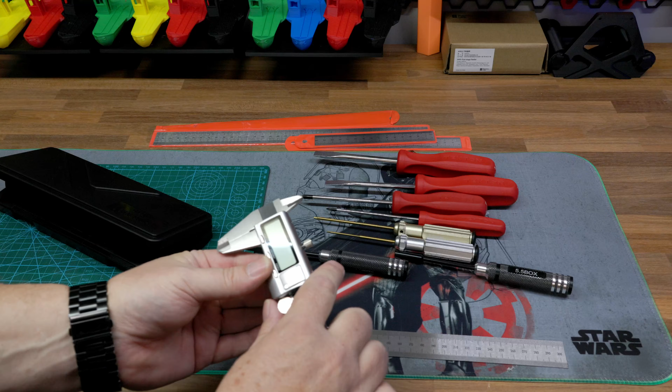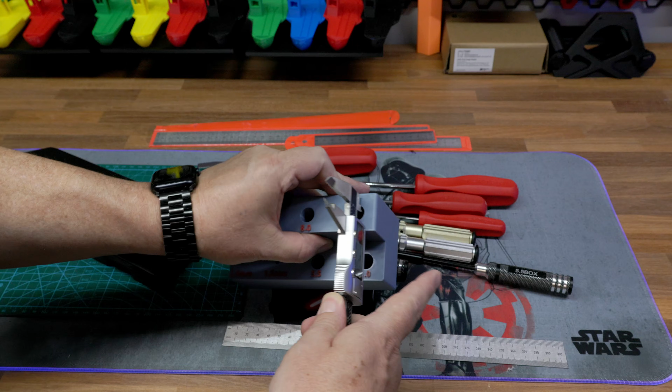The last thing I'd recommend is a good digital caliper. I have links in the description to all of this stuff. What these are good for is whenever you need to make a hole, they're really good to measure the shaft or whatever it happens to be, or measure the inside of a hole that's already there. So with that, these are the tools I'd recommend for today's project.

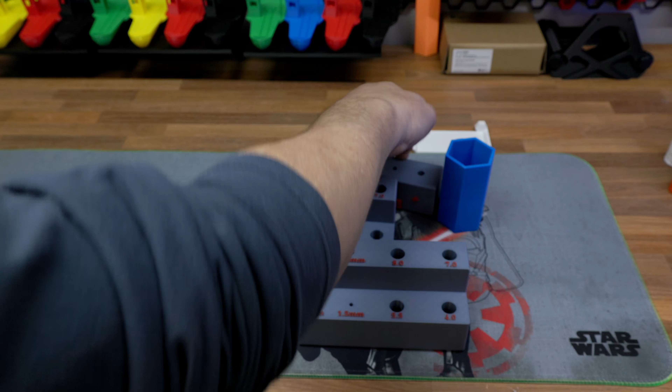So let's get started. Let's go over a couple of things we'll be making today. I think we'll make a couple of screwdriver stands and some hex driver stands. I'll show you all the different ways to do that, all the way from making the holes, making these blocks, how to add cool logos to different things, but probably more importantly, how do you actually attach this to the honeycomb wall easily.

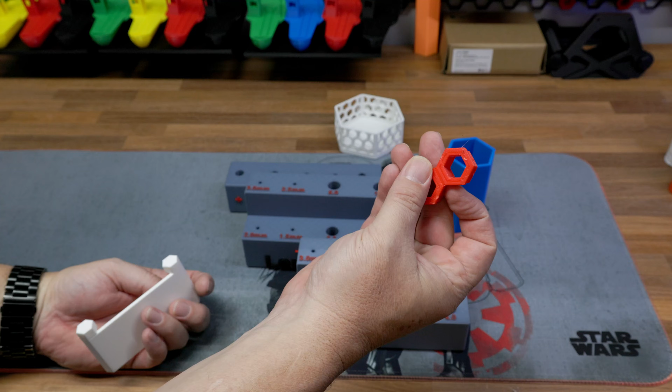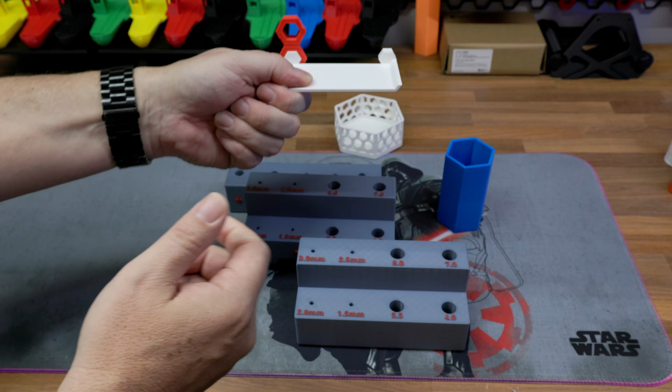If you guys have printed this out already, you know there are these inner hexes and outer hex things, or you can even see on the connections they have these open hexes. You can either slide things in and snap that into the honeycomb, or you could even print these right directly onto the back of the object you're trying to make and just put that on there. At first I was super excited to do that because that seemed like less printing, the easy way to do it.

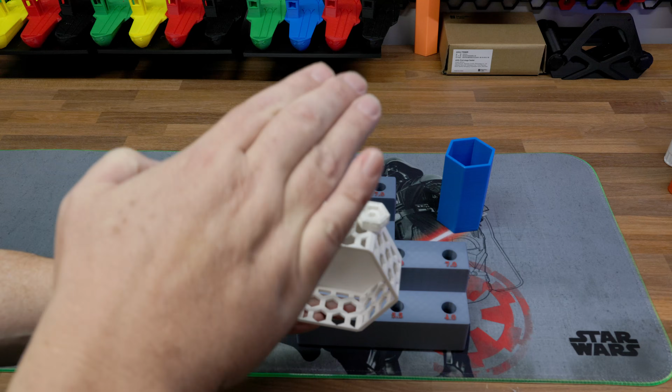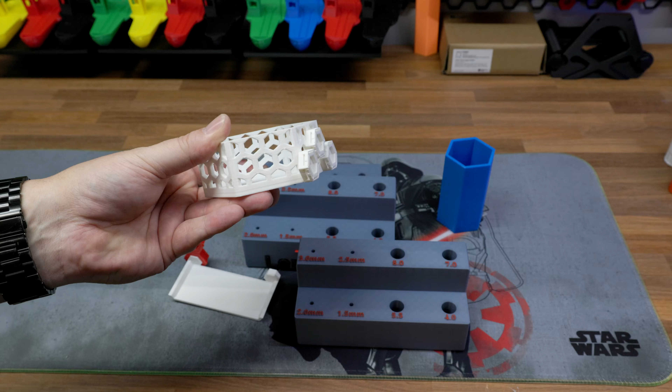But I can tell you, if you print it like this, you'll be fine, it'll print just fine. Otherwise, as soon as you put it on its side and it has to print all of these gaps, you can see this one's not totally perfect. So it's a lot harder to print these pieces, and you really have to have it in a certain orientation to do so.

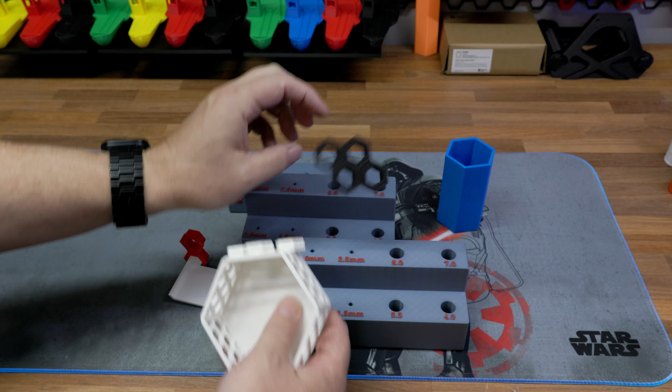The other thing that's a huge issue with doing it this way is, say you have one of these corner pieces that's connecting your honeycomb and you want to put this right where one of those go—you can't really do that.

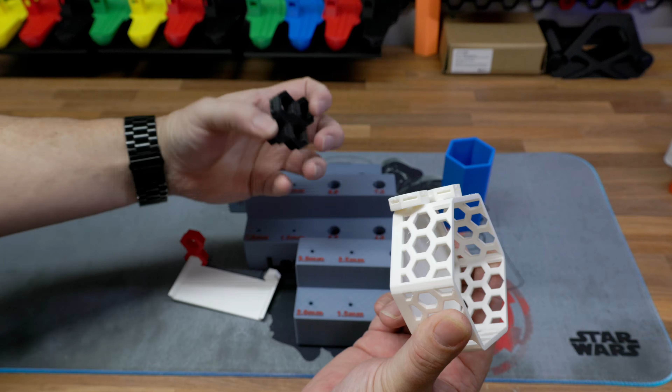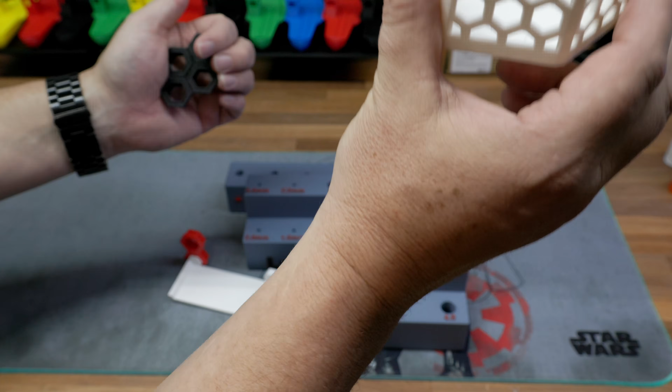So I don't recommend, again, you can do what you want and put these things on there as you want, but I don't recommend printing these for those two reasons: hard to print, and then it's kind of hard to place the thing afterwards because you can only put it in certain places. So everything we'll be doing today will be based on this shelf.

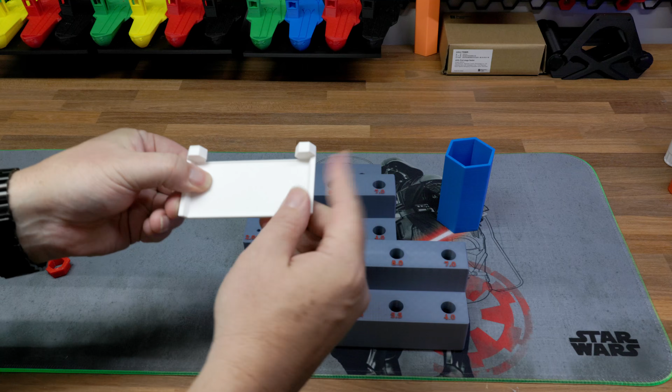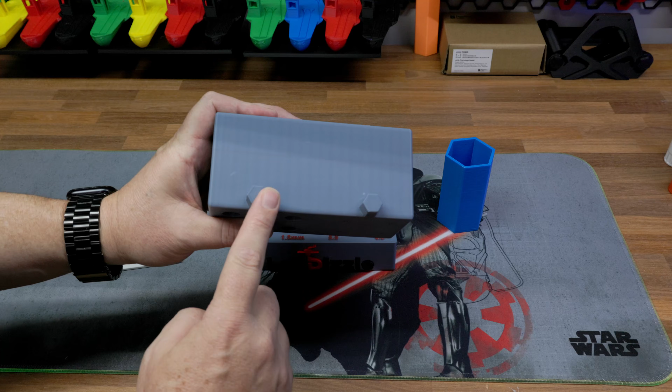The shelf has 2 of these things on there, and mainly this hexagon that's right there. You'll see on the back of these, that's how I am connecting these. I can just throw something on there and snap it onto the wall, or if I need to put it on one of the connectors in between, I can easily do that.

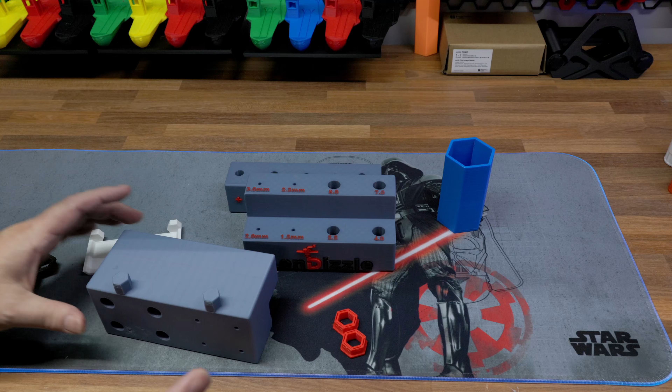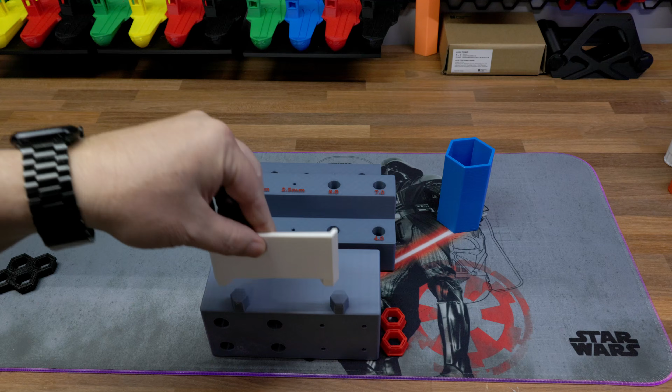But what else is crucial is getting the spacing between all of these correct, right? The spacing here needs to be the same as the spacing that's in there. So I can tell you that these shelves that are already pre-made are super helpful at doing that.

If we can just cut off these little hexes on these shelves and attach them to our pieces, that would be a real easy way to do that, and I never have to measure anything at all. So that's the route I've gone: use just these inner hexes, use the shelf in Tinkercad, and slice off those hexes since they're the right measurement I need. I just slice off the shelf, add it to my piece, and we're good to go. Let me get Tinkercad set up and I'll show you what I'm talking about.

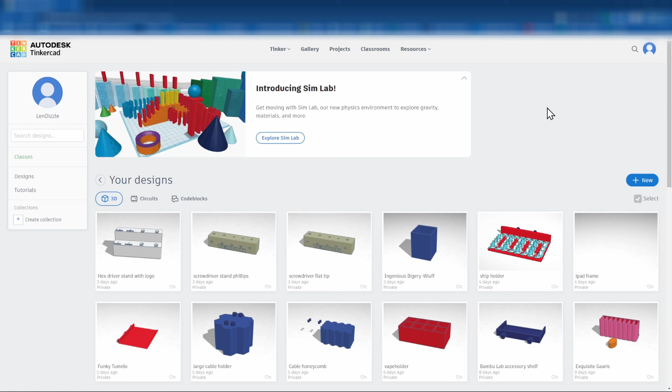Head over to tinkercad.com, sign in with your Google account or set up an account. This is by Autodesk. You can use other software if you want, like Fusion 360, or any of the different CAD designs. The only reason I'm using this one is it's free, you don't have to download anything, and it works pretty good. The concept of what I'm doing here can be translated to these other programs—there might be some differences, but the overall concept's the same.

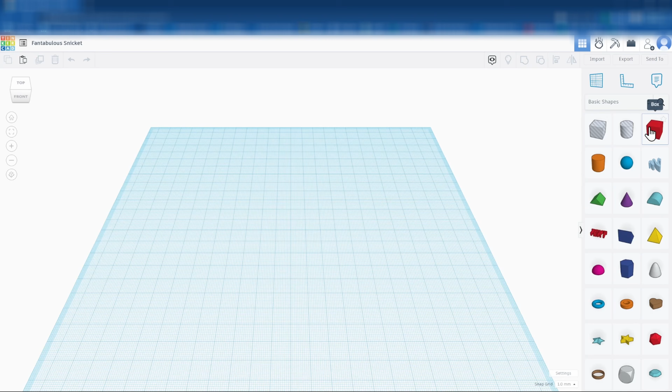So what we'll do is hit New, 3D Design. Really, what we'll be messing with today is these top 3 objects right here. Not that we can't use the rest of these, but for today's purposes we'll be using these. Hopefully this will jumpstart you into playing around and tinkering in here—Tinkercad, the name of it.

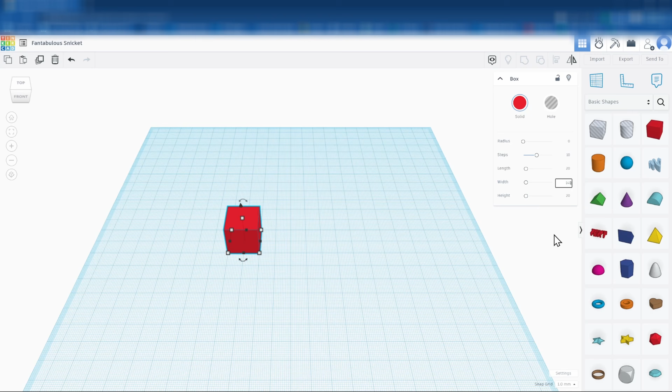So we'll start off with the box. Let's make a holder for 4 screwdrivers across right here—we'll say we're making a screwdriver holder. That's a pretty common thing you'll need in your makerspace, right? So let's go over here and change the width to 140. We'll leave the length and the height at 20 millimeters. Again, you can change this to fit whatever sizes you need.

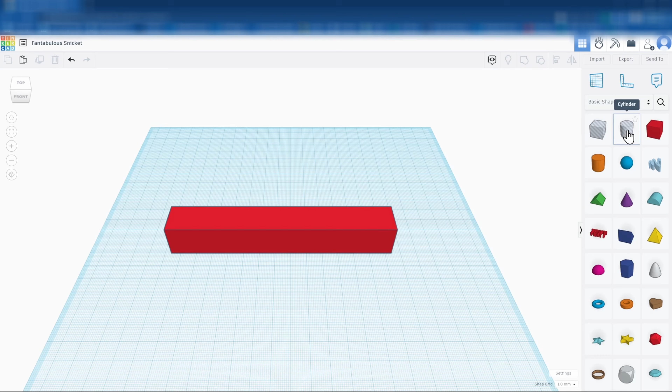So what we'll need is some holes in this block across here to hold our screwdrivers, right? What's neat about Tinkercad is it has these hole shapes, which is kind of like the negative part stuff you see in the Bambu Lab studio. What you can do is have this shape, and it'll make a hole wherever this shape is whenever you combine the shapes together, and I'll show you how to do that.

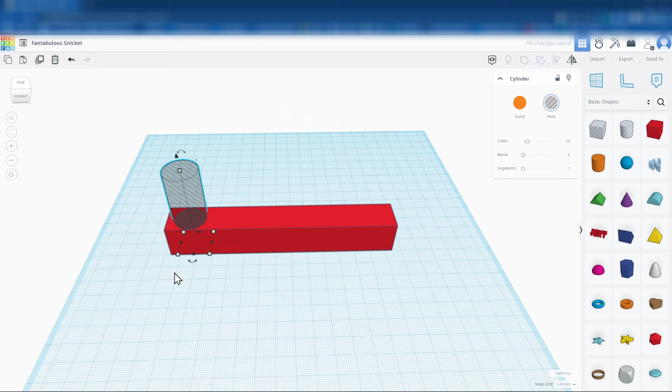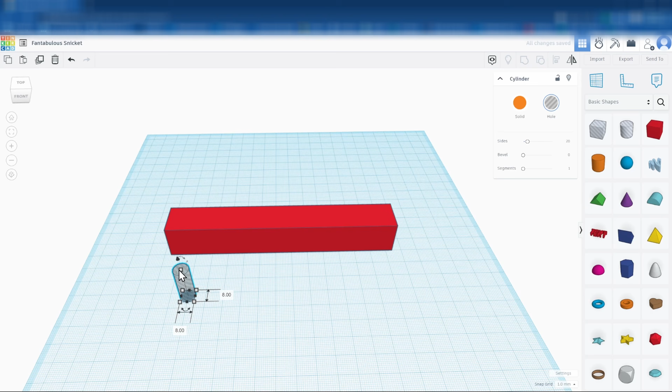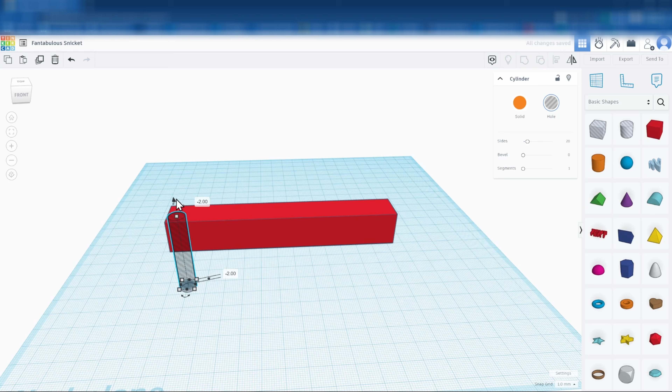So let's say we've measured our screwdriver that we want to put in this first hole here—all of our screwdrivers are 8 millimeters around. So we'll use shift whenever we click on here, and hit 8 millimeters, and it'll scale everything down to 8 millimeters, 8 millimeters, and the scale of whatever this one was. We'll want to make sure this is definitely longer than the object, and we want it to go all the way through. Right now it's sitting right at the surface, which will work, but I always like to hit this little arrow to move it down a millimeter or 2—that arrow is how you move things up and down.

So same with this, if I wanted to move it up and down, I could do that as well. Now that we have the size of our hole, we need to place it in here, and there's a couple of tricks we can use to do this.

If you set it right on the edge, you'll see that the snap grid is 1 millimeter. So every time I hit the right arrow, it's going 1 millimeter. I can take this to the edge, put the center on the edge right there. But let's say I wanted this 10 millimeters in: 1, 2, 3, 4, 5, 6, 7, 8, 9, 10.

You can use a ruler to do all of this, but I'm going to try to make this really easy. The other thing we want to do is center this. So again, we could do 20 millimeters, 8 millimeters, do all of that math. Who wants to do that?

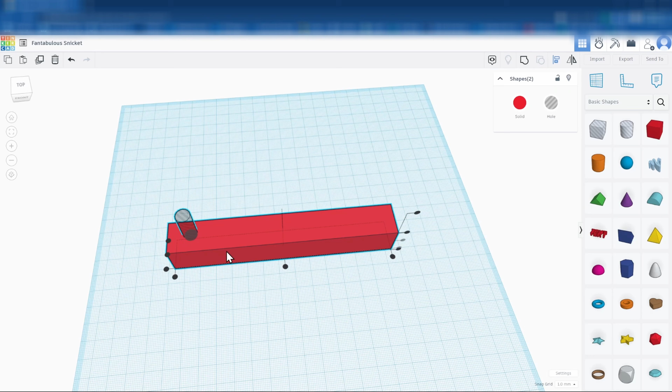Just highlight both of these. Click this little thing right here that says align. You'll see these dots come up. Click on the object that you want to center on, which happens to be this one, and you'll see a little center thing there. See how it's trying to move the object? It shows that little orange thing there. So that's what we want, that will center the object. Just click off of that somewhere and we'll be good to go.

Now we need to make holes all the way across here for the rest of our screwdrivers. There's an easy way to do that as well. Click on this little hole that we created again and go over here to this duplicate, and you can hit Control D, but we'll hit duplicate. Now there's another one of these holes sitting right on top of this hole.

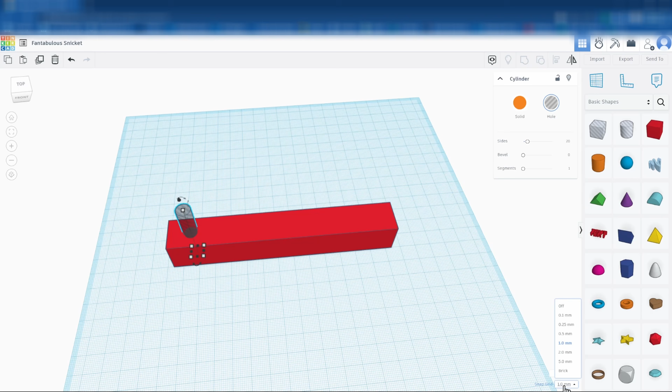Again, our snap grid is at 1 millimeter. We can change it to whatever we want, but we'll leave it at 1. Let's say we want this 20 millimeters to the right: 1 through 20. All right, so now it's 20 millimeters apart.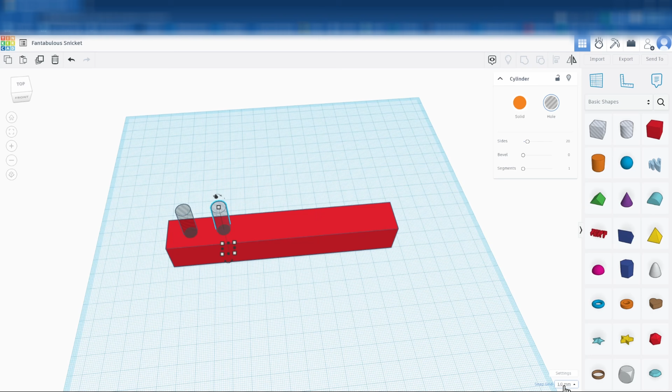Since I only hit the right arrow, it's still centered because it's still in the same plane it was before. But here's the really cool part - if I go and hit this duplicate again, it actually put it 20 millimeters to the right, repeatedly. So as you can see, that would be very, very handy.

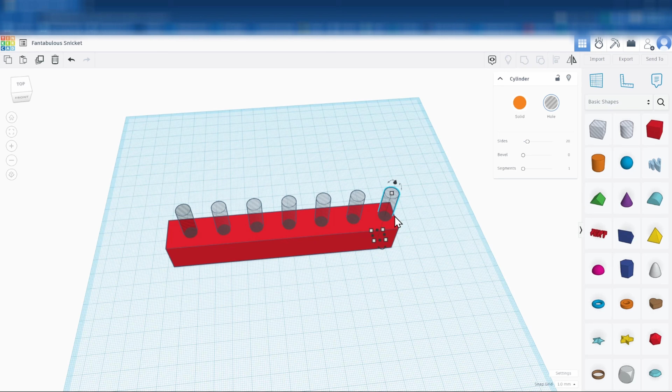But now you can see that my edge over here isn't the same as my edge over here. So how can we fix that? Well, let's just hold Shift and highlight all of these. This is how you combine it into a group - we'll make this a group. Now when we select it, it's the whole group.

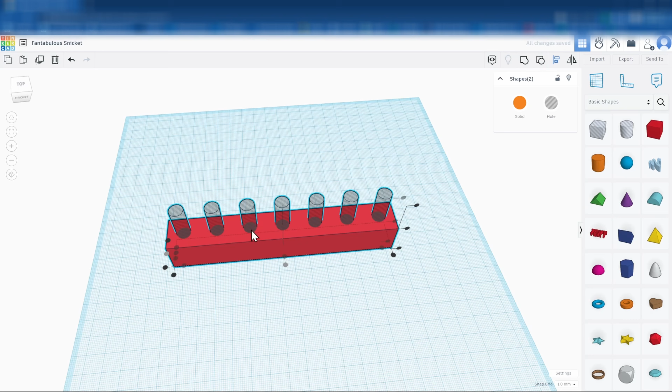We'll hold Shift and select our box, and go back to our alignment tool. Now you'll see that I can center everything there. So now everything's evenly spaced across, and I centered it back on this object. Holes are still going through.

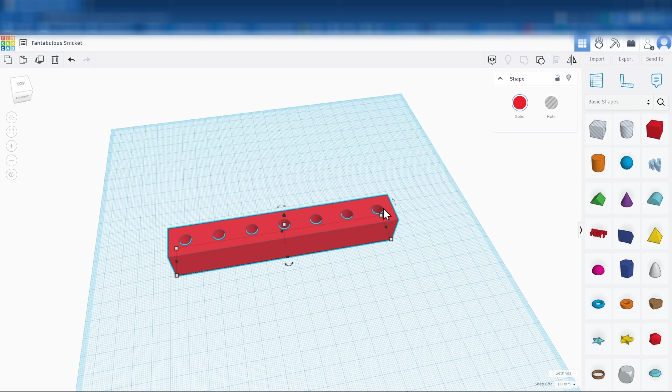Now to make the holes final, you'll want to highlight everything and hit this grouping button again. When you group a solid and one of those hole objects, that's when it makes the hole, and as you can see, the hole went all the way through. We can click everything in there, get that going, and do that.

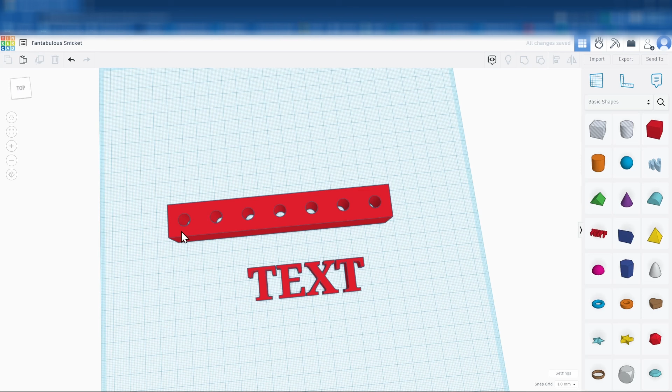So as you can see on the other page, I built a ton of these. You can put text on there if you want, showing the size of it or whatever that happens to be. That's how I did the 2.5 millimeter, 3 millimeter, and all of that stuff on there.

So that's really cool. Now let's go over how we would put the little hexes on the back of this thing so that we could attach it to our honeycomb wall. Let me show you the easy way to do that.

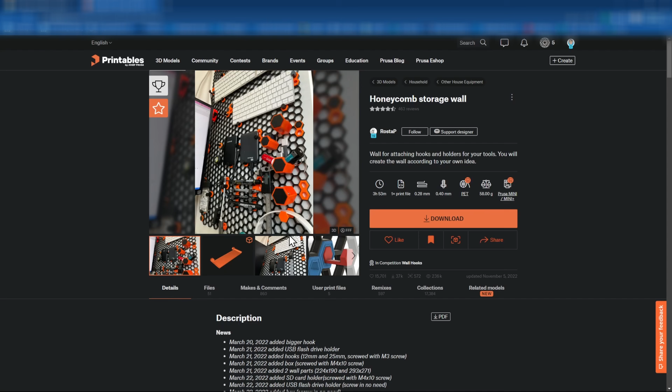So what I do is go over here to Printables, and I've actually saved the honeycomb in my collection here, so you guys can see some of the things I'm looking at. We'll go over to this wall, and what I'm looking for is this shelf. The shelves here are really the key to making this happen, and I would recommend this one with 3 holes on there. Most of the stuff I use only uses the 2, but I bring this into Tinkercad, so I have that.

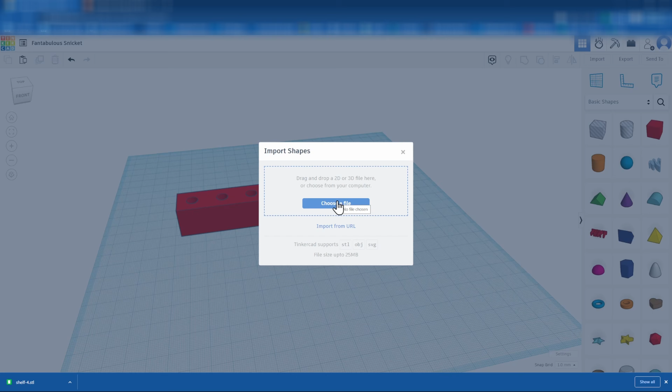So what you're going to want to do is just download that, leave that in your download folder, and go back over to Tinkercad. You're going to hit import, choose that file that you just downloaded from your download section, and hit import.

Okay, and that's going to give us this shelf. What's cool is we have three of these hexagons that are in the perfect distance apart for us to use. The only thing is we've got this stupid shelf in the way.

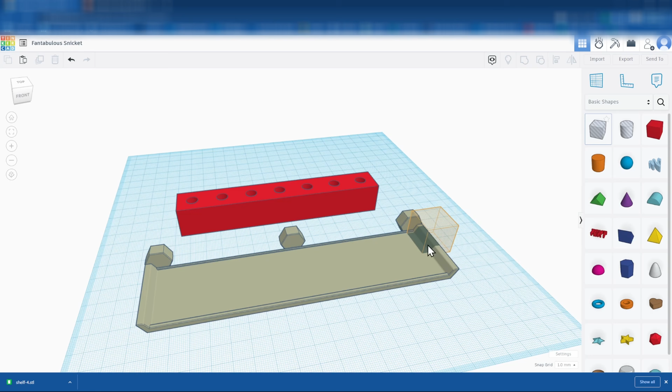So the easy way to do that is to just take one of these boxes. That's the hole, so you'll see that it's hole. I can switch between them too, so I can always make things a hole. What I'm going to do is just highlight all of this shelf here, move it around, we're good to go there. So now if I just highlight these two and group it, you'll see that we left a little bit. We'll hit Control Z, we'll click on this again.

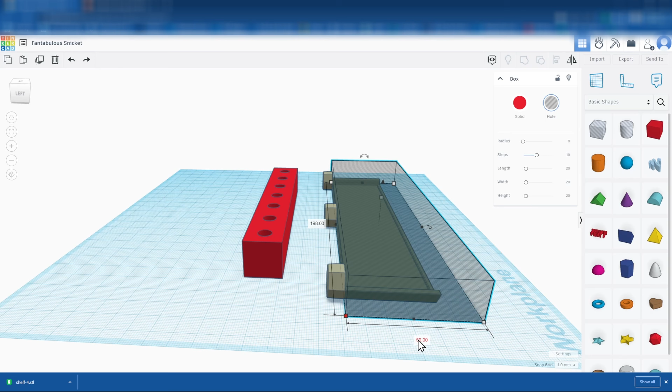It looks like it needs to be 50. And then we'll group it again. You'll see that the shelf is gone and you're left with all of the hexagons. And they're in a nice little group that you can move around, so the spacing between them is always where it needs to be. But as you can see here, our object is not big enough for all three.

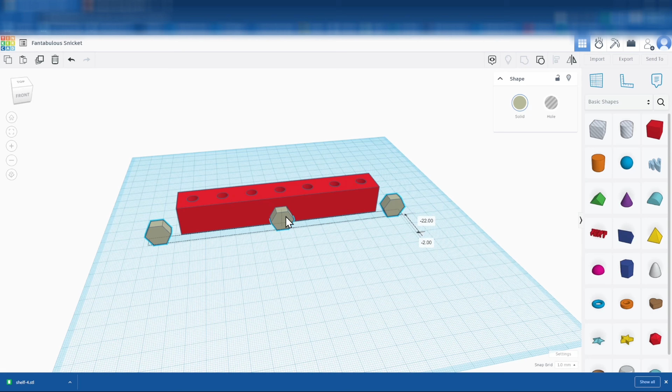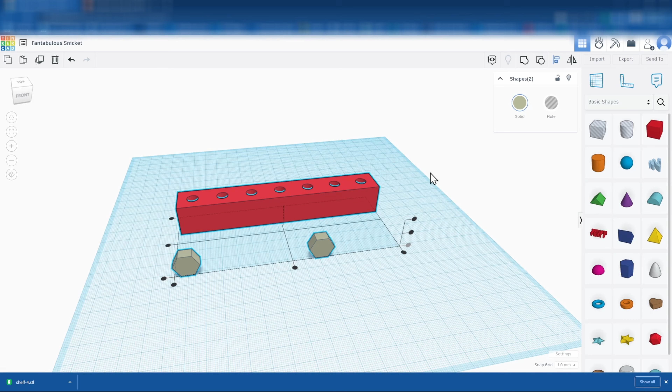So let's take a box, combine everything again, and we'll see that we'll have two, and it's again in a group. So taking lessons that we just learned about centering things, now I can hold Shift, select that object, select the alignment, align this right to it, then just use your arrow to kind of smash it in there a little bit.

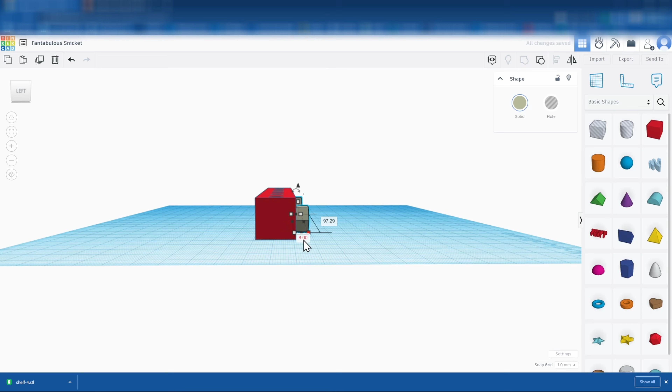And then what I like to do is make this about 8 millimeters. Now you'll see that we have these centered. They're on the bottom, this will be easy to print. Then you just snap one of those hollow inserts in there and you snap this directly into your wall. So that's how I did everything there. That's the easy way to get the holes. That's the easy way to build the block right here.

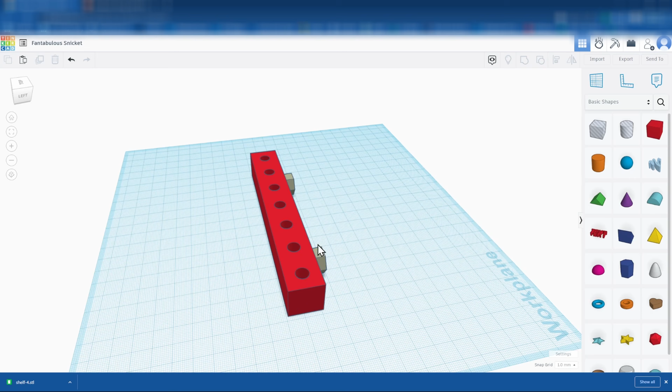That's the easy way to get these hexagons on here. So the last thing that I'll show you is how you can put text and how you can put a cool logo on there. For text, all you need to do is just drag and drop this text in here. And you can always just spin stuff around.

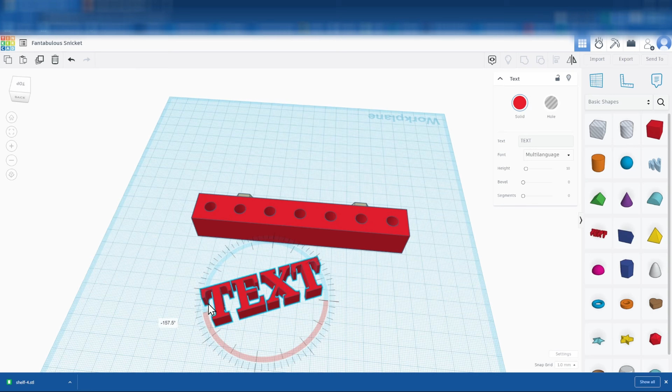If you keep your arrow within this, it'll snap to these different things. If you hold your arrow out, see how I'm outside of the circle, it'll let you do very fine-tune adjustments. If I stay within this, it just snaps to the different things. So that's super handy to snap right away.

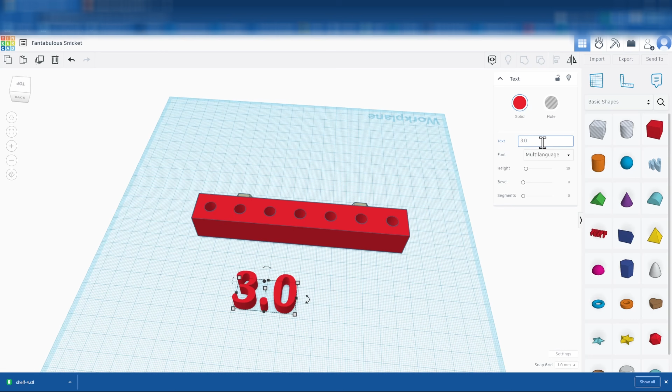So let's say I wanted to make this 3 millimeters. Let's say I have a 3 millimeter hex and I want to use this as the little marker that goes on there. So again, hold Shift, that way we get it to scale down.

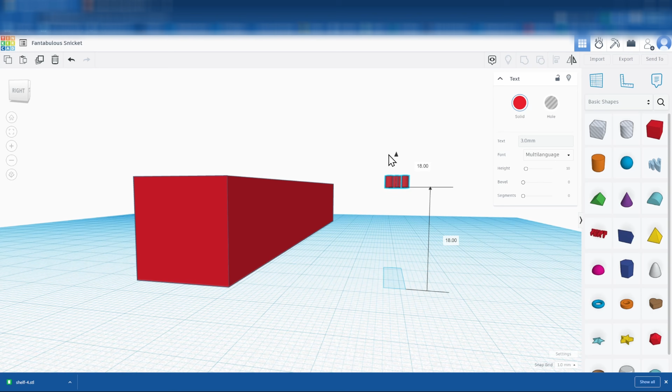And then what we'll want to do is, we know this is 20 millimeters high, so we'll raise this up to just under 20 millimeters, to like 18, because this thing is thick, and we'll want to just set it on top of there. Then now I can just use the left arrow to bring it right on there, and we'll see it's not quite poking up. So we'll just go up 1 more millimeter to 19.

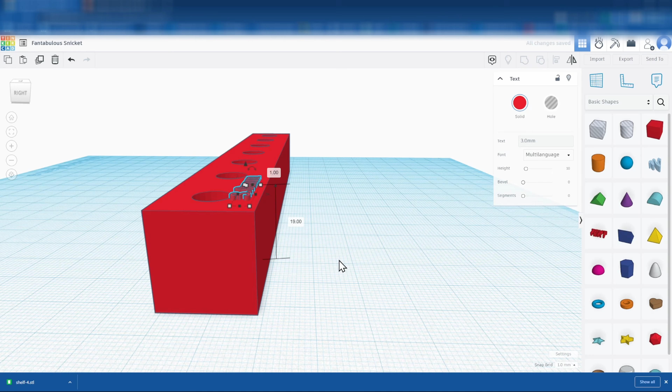And as you can see, need to make it a little bit smaller, so we'll hold Shift again, bring it down. What's cool here is you can ungroup everything here to bring these cylinders back in. So now I can take this and my little 3 millimeter, go to Align, click on the cylinder, and align it to the cylinder.

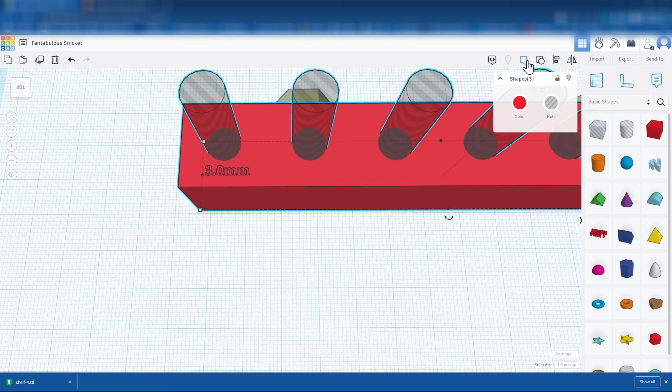Then I can group everything back. We'll see that the hole is back and I have that little 3 millimeter just sticking up. So that's how you can label everything across there very, very easily.

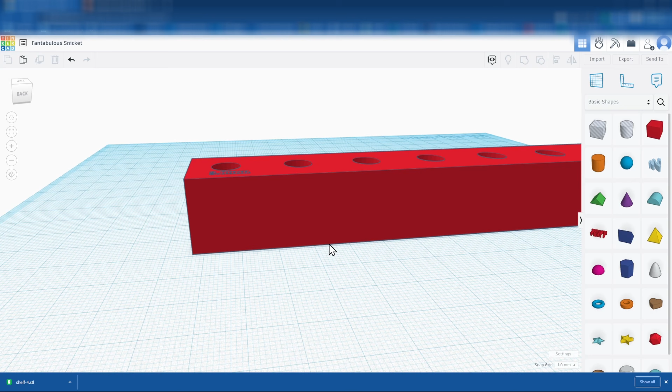So the last thing is, how did I get the cool Lindizzle logo on there, and how did I get the cool Tekton logo on there? The logo for the Lindizzle I had made, so I have a PNG copy of that, and that's what you need is a PNG. And for the Tekton one, I just did a search for Tekton PNG, and under images here I just found one of these Tekton images and saved it.

So there's a PNG, we'll save image as, save it to our downloads and call it Tekton. Then you just find a PNG to SVG converter, and that's what we'll need to turn this PNG into SVG. The reason we do PNG is that it's just the letters and doesn't have any background. So if we just want the letters to paste on something, it's important to have just the letters and not the background. So you do a PNG to SVG, select one of these and convert it to an SVG.

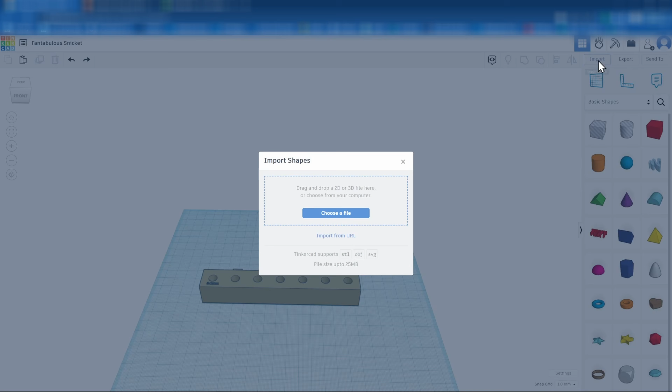I'm going to do that real quick with one of these, and I'll meet you back when I have that finished. All right, so once you have it converted to an SVG, we'll go ahead and hit import, choose file.

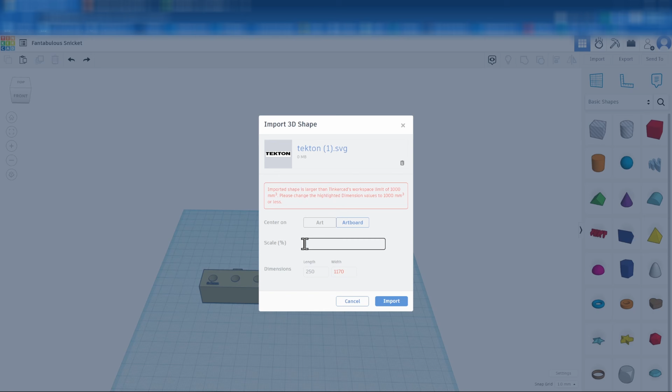It'll either show a Chrome or an Edge, I haven't changed these files to be that. And sometimes you'll be greeted with this warning that says it's over the limit of 1,000 millimeters. That's because it's using every pixel across as a millimeter, I believe. So what I generally do is hit like 50% scale.

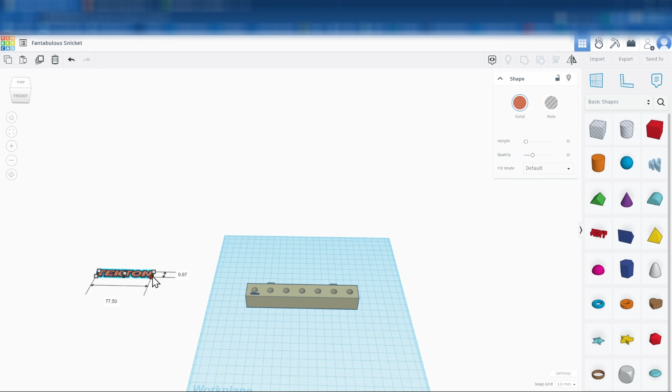And then that warning will go away. We'll hit import, you'll see down here that it's working on it, so we'll give that just a second. And then you see, man, even at 50%, this thing is huge. So again, we'll hold our shift, bring that down to a more manageable size, move it over here to our place, and then we'll scroll back in.

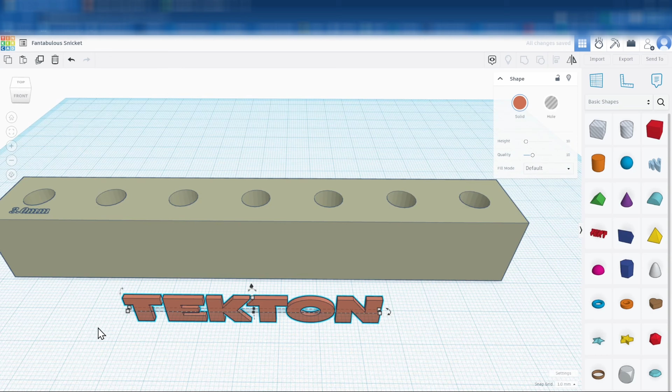So again, we can tilt this up 90, and then use our trick from before with the alignment, and we can center it, and then same as before. Oh, we'll see that when I flipped it, it actually went underground there, so you'll see that negative 2, negative 3, negative 2, negative 1, 0 - that means it's at the base level.

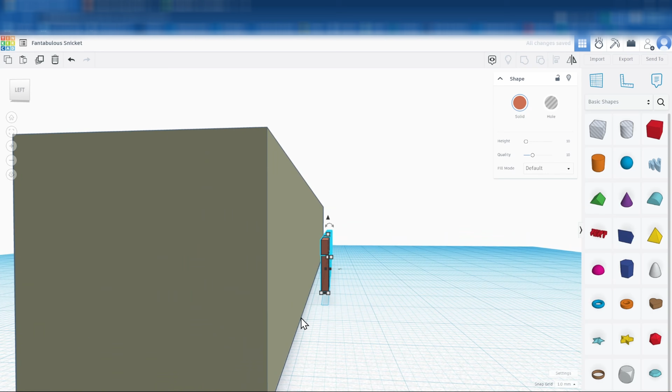Let's move this up 2 millimeters. Now, just bring it in, smash it in there a little bit. If you don't want it to go as far, we can do 0.5 millimeter on the snap grid, and it'll only take it in there. Yeah, that looks really good.

So that's how you put the logo on there - super easy. And then don't forget to group it, make it part of the piece there.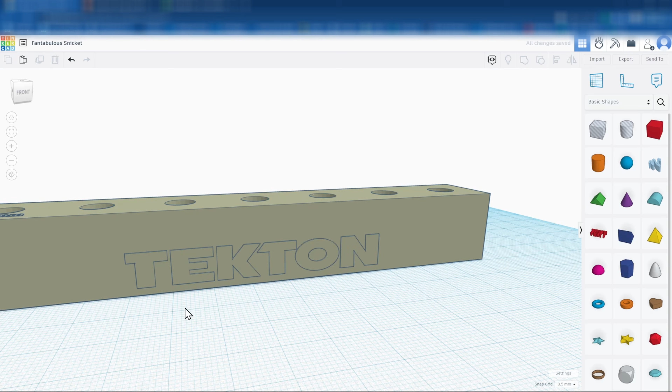All right, so that you can take in all kinds of different directions, right? You can make some nice honeycomb or hexagon storage things for cables, USB cables and stuff like that. Put all that stuff together. And then really that trick is to...

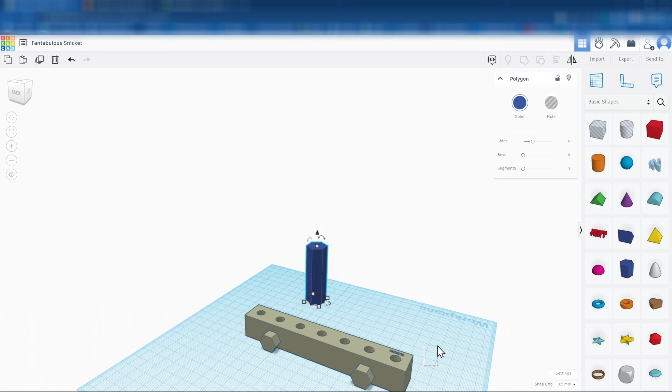Have these hexagons right there, and have them evenly spaced and everything like that. Then what's cool is for future projects you need, all you do is come back into this project since everything's already done - just ungroup everything there.

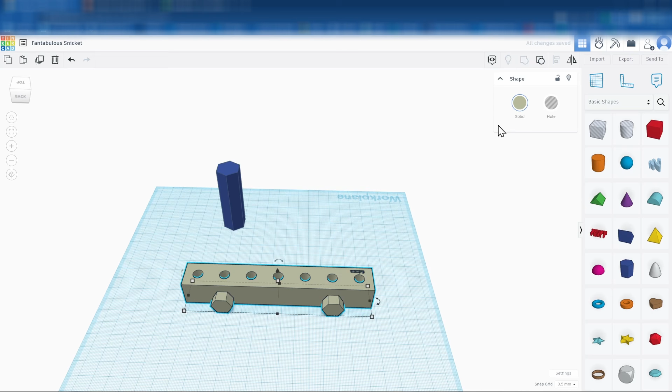You may need to ungroup it a couple of times like I had to there, but now I can select these and just hit copy and then go into another project and just paste those right in there, and I don't have to take the shelf apart again like I did on this one.

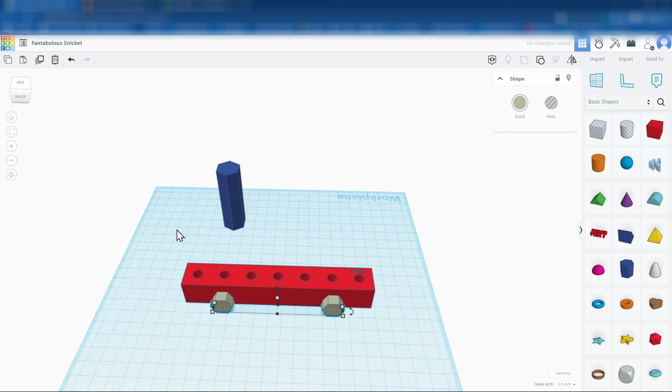So we'll put everything back together. And then once you're done with your project, let's delete this. It's very, very easy to export.

So we have our logo, we have our holes, we have our little holder, the hexagons are on there so we can attach it to the wall. So we're ready to go. We can just hit export and hit STL. And it's just like printing anything else out on our Bambu or whatever printer that you happen to be using. So you can easily export it as an STL.

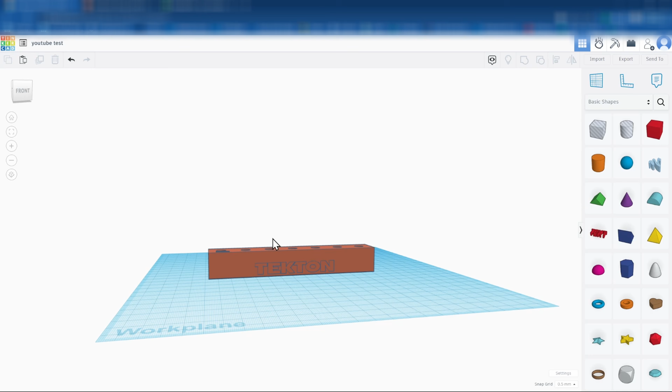One other thing that I didn't show is it always has some crazy name for it right here. So you can always change the name to whatever you want up there, and it'll show up in your dashboard from there, and whenever you export it, it'll show up from there.

So always hit the STL button, export it. You'll see that it's ready to go, and it's ready to go right into Bambu. And for us to print, I'm not going to go over that - that's a different video, but I hope you enjoyed this one.